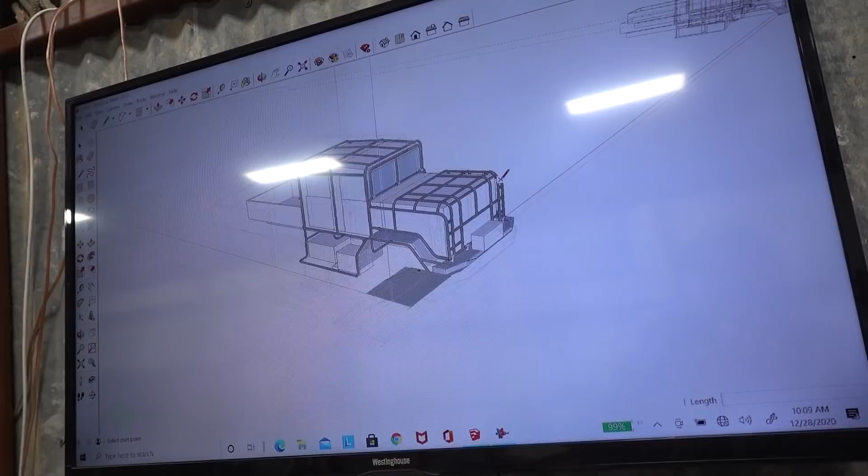This is crazy. This is what we started with. This is like what I kind of told him I was looking for. I sent him a bunch of pictures. There's like Humvees and some off-road buggies that have a cage around them all. And I was like, I want an exoskeleton like this. So he measured the truck and put it in here, and then he went in here and built a cage around it with what I was kind of looking for.

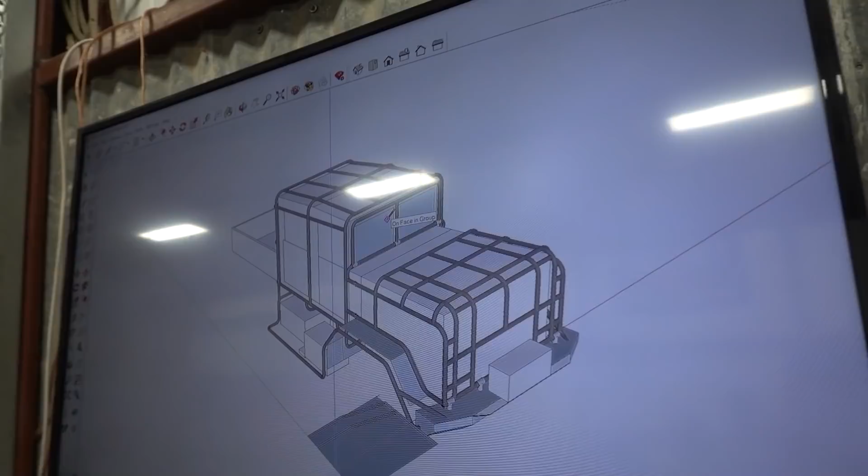I want to be able to plow through things. I also want a little bit of an exoskeleton around the cab here, and then you can see we have a window shield that will fold down out of the way. My plan is to put expanded metal all across the front of it.

The problem is, this didn't work out, right? No, we learned that pretty quickly. So Brandon welded up some pipes, and turns out this thing, you look at the truck and it looks very square. It's not as square as what we thought. He measured here and he measured here, and we all assumed everything was square, but actually the truck slopes down right here a lot more than you think. It also slopes inward, right?

Yeah. And so the pipes in the front were way off the truck. You can see the pipes are really far off the front of the truck, and it still looked cool, but just not as good as I was thinking. So we decided to go back and chop them. We did a little revision on it, and made it follow the body lines a lot better, and compensated for the unsquareness of the truck.

So, but it was definitely worth it. Let me show you what we got now.

As you can see now, we had those pipes. The plan was just coming straight off here and then straight down, because we thought the truck was square, but it really looked weird because it was sticking up so far.

So now we have two bends, one there and one there, to kind of follow the contour of the truck. We also brought this one down a little bit. Oh, it's raining a lot out here. Now they hug the front of that truck.

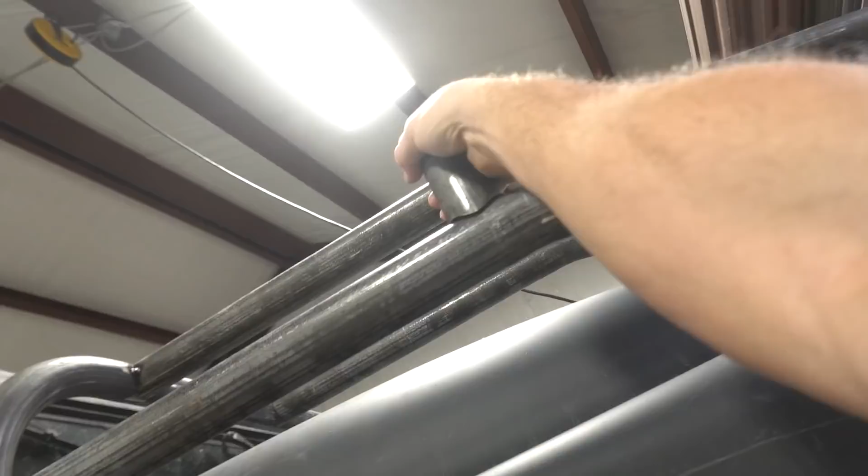Looks so mean. So the plan is today to continue cutting pieces and welding them up. This stuff is just kind of sitting up here, not all hooked in yet, so we're going to continue tacking everything. Luckily, we'd only tacked everything before, so it was easy and quick to take off, and we're still able to reuse the parts we took off and use them in other places, like that piece right there.

Brandon got it looking good, and I was like, we got to take it out and make it better. We're doing this once, we might as well do it right. So exactly, we tore it up, we're gonna make it a little better, but now we're gonna go along and get all the little pieces in, start filling it in, so we make it really strong.

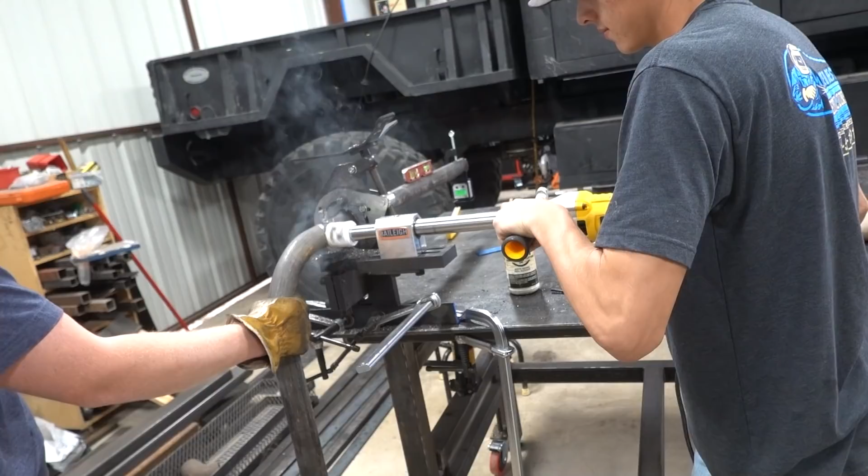We have a lot left to do on this. So he's cutting that notch there, but you can see he had a level here and a rotation gauge there, making sure everything is perfectly straight, because it needs to fit in there right.

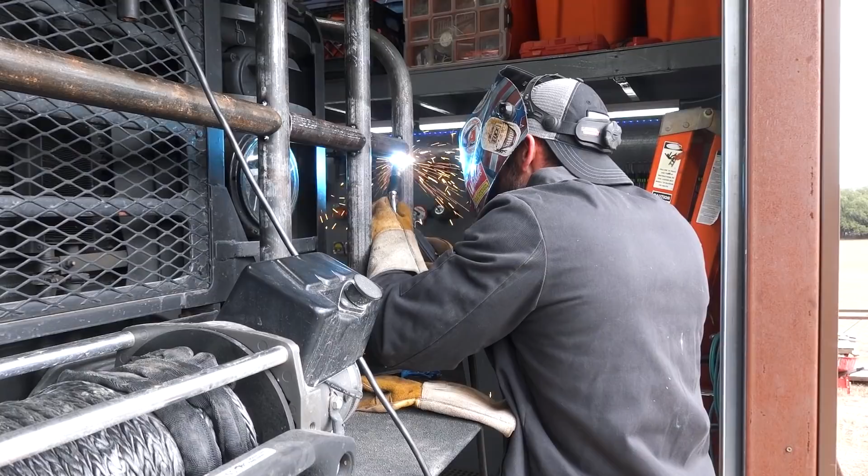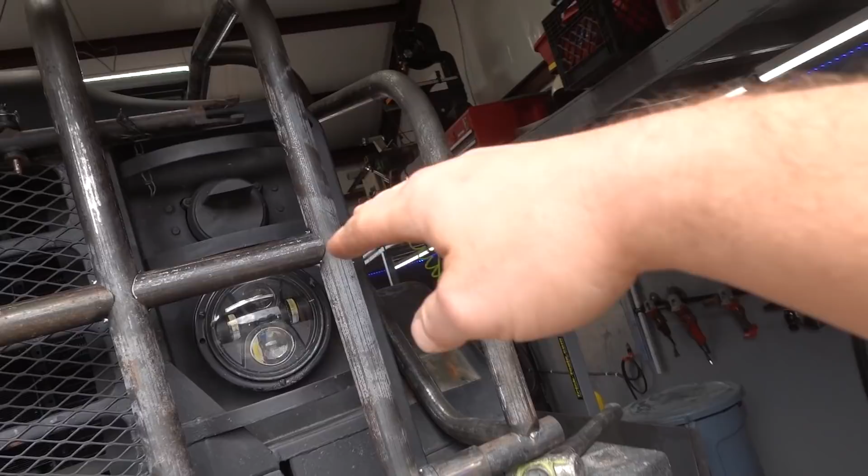So we just got these pieces stuck in here, trying to figure it out. The lights, I don't think are gonna be an issue. They're not gonna be blocked because, I mean, it'll block the top a little bit, but that light is almost 6 feet tall, so we don't really need it to be shining more up. We're gonna put bigger lights on the rest of the truck eventually for times when we're not on the road and want everything to be really bright. So this is not gonna be an issue.

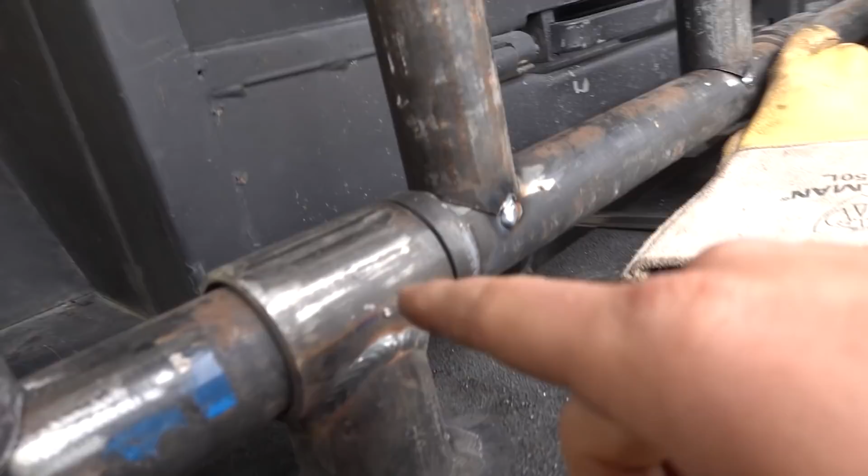Gonna be nice and beefy, just tying all these together, just tacking right now. We left a big opening here because this whole thing is gonna have to fold down so that the hood can come up — it has to fold down and not hit this. So we have these hinges here, basically just pipes sleeving this pipe, and this whole section is going to fold down around that.

And it's gonna be super heavy, which we aren't really sure how we're gonna actually physically move it down. But we'll figure that out later. Build it first, and then we'll figure that out, and work the kinks out — like, how do we actually lift that up? Because think about this, that's all that weight's gonna be over there. You have to first lift it all the way up.

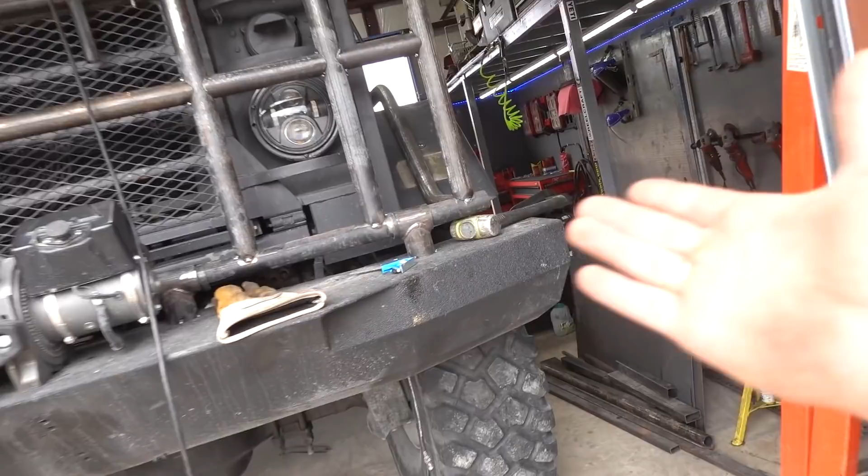And then once you get to that tipping point, all the weight's gonna want to smash down here. So yeah, we're gonna have to figure that out when we get there. But let's build it first, right? Exactly. Yeah, I think we're making good headway.

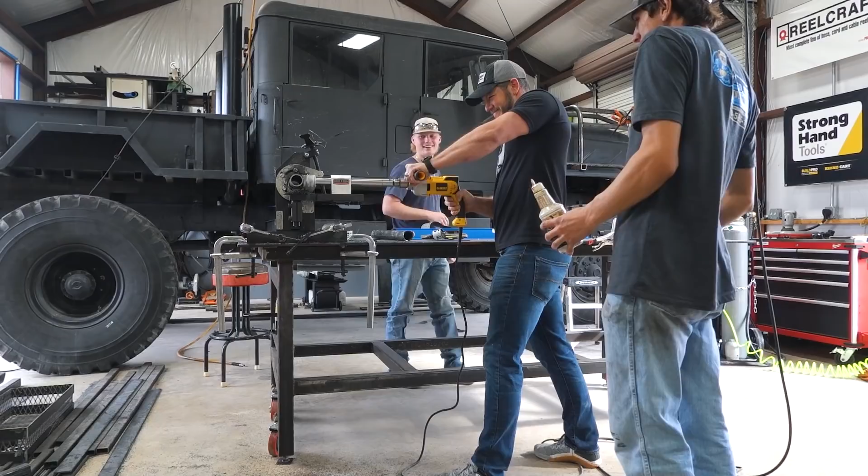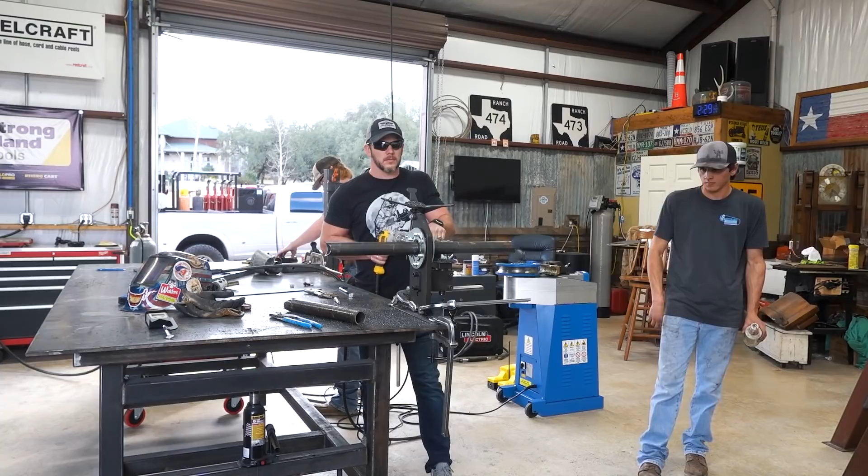Kind of making this stuff up as we go along here. So we have these things cut to go probably about right there, same with this one — it'll go right about there. So we're gonna have a line going across right here.

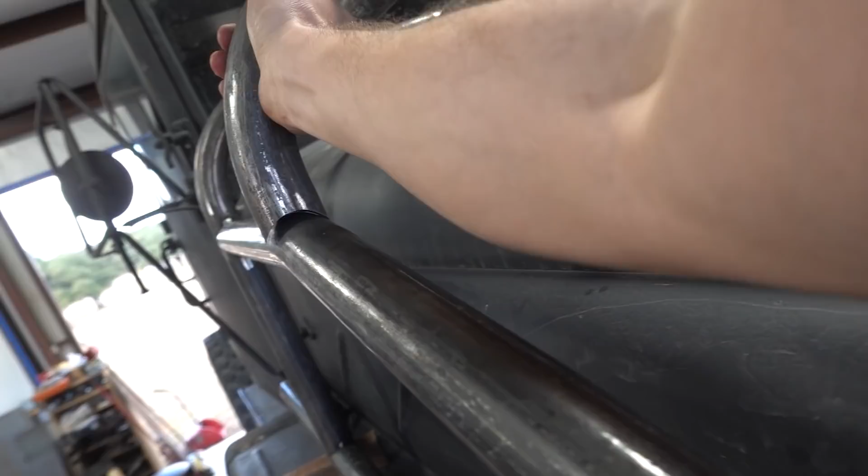And then we have these macaroni noodles right here — and I can't do it with one hand. We're probably gonna have it right about there is where it's gonna make the turn. It's actually gonna be back a little bit, and then it will carry on across there and macaroni noodle down to the other side as well. Just trying to figure out all this.

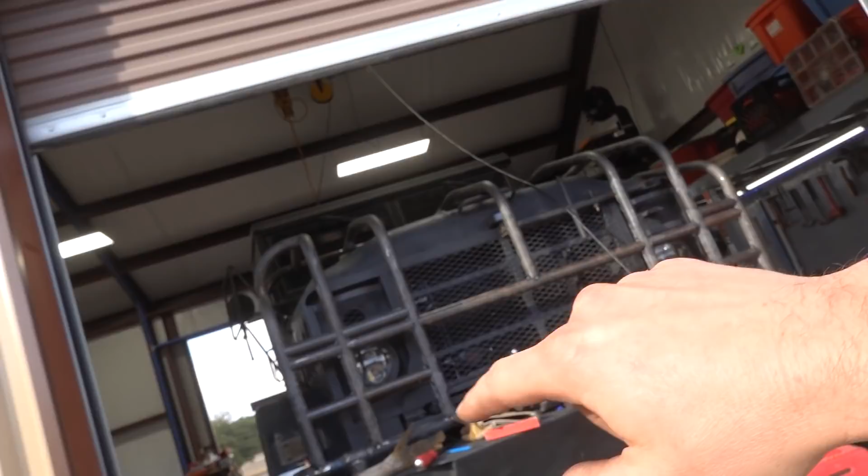We want this thing to be super beefy, so we're trying to figure out how to make this the beefiest. On the top of the hood, it won't have as many supports because we're not gonna be hitting stuff as hard with the top of the hood, but the front, I want to be able to drive through that building or Whistling Diesel's monster truck or whatever and come out unscathed.

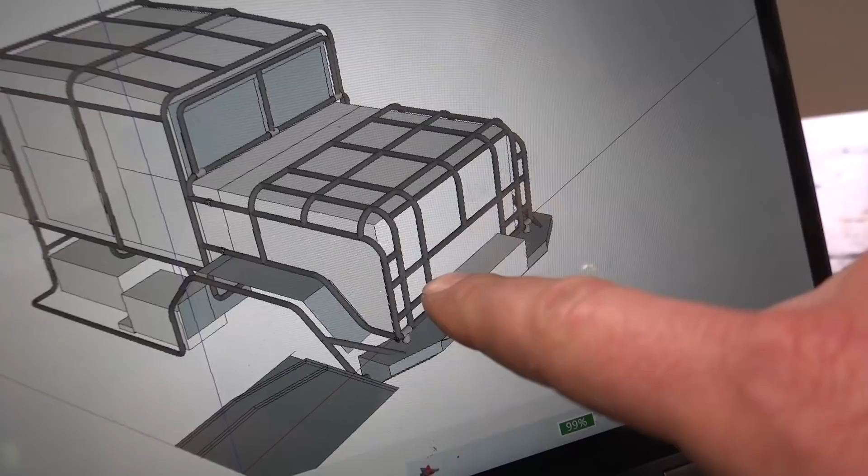So that's what we're trying to figure out here, just trying to get all the weaknesses fixed so this thing can plow. You can see that's kind of different from our plan. We don't have that bar, but we had one on the tip and another one right there. We're not gonna do all that. We're gonna have it come up a little bit over here, and these are all double angled now, so they're not as boxy as it looks in this picture.

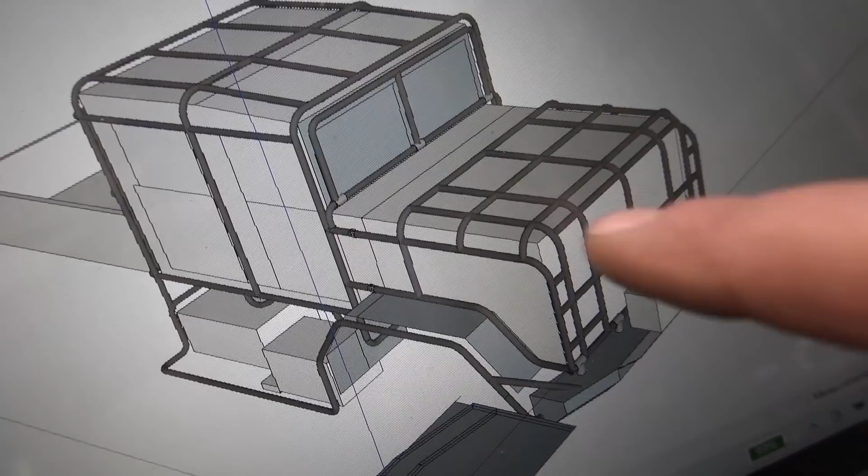What you haven't seen yet is the windshield guard, which will fold down right there. Also, this fender is thin metal and sticks out over here, so a tree could rip it off. So we're gonna have some bars that come out and follow that fender all around, tied into the frame underneath to give it strength.

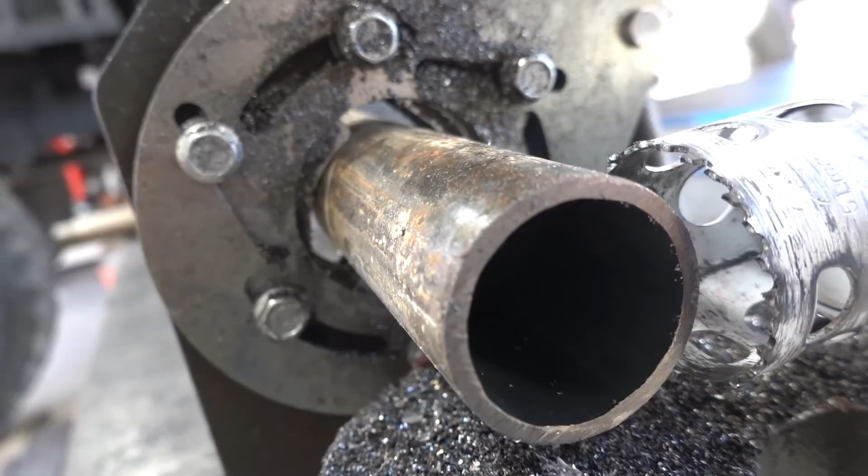This is all Schedule 40, 1.5 inch seamless pipe, so very thick, very heavy duty for this 5-ton to start ramming some stuff. Brandon was just telling me this is actually 2-inch outside diameter pipe, and this is a cool little mechanism to make these cuts.

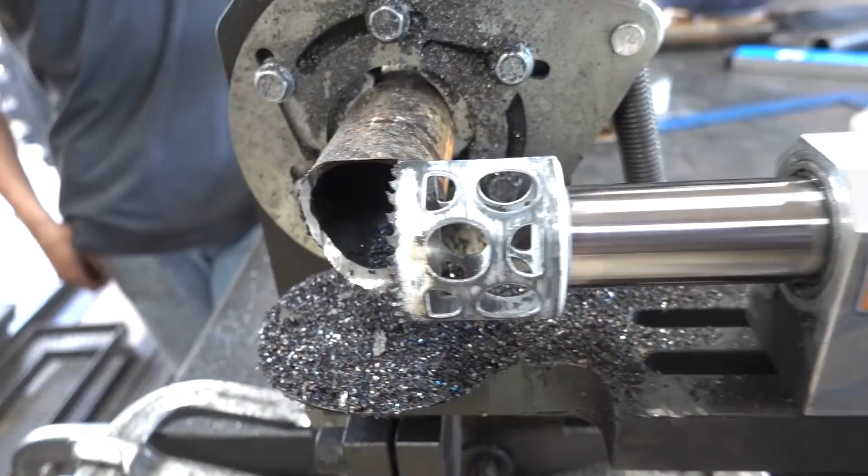What do you call this, saddles? Yeah, or pipe notching, this is how we notch them. This drill just keeps everything in line right here and makes a perfect cut right through that pipe so it fits perfectly on the other pipes, making a really nice, easy way to weld it.

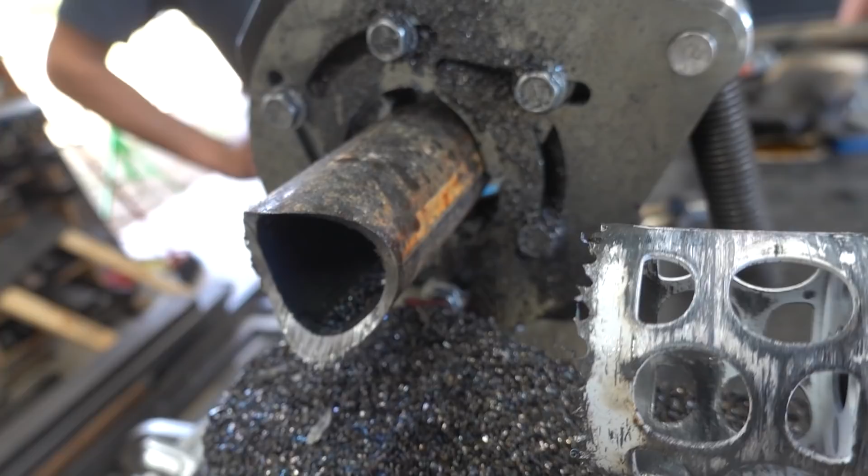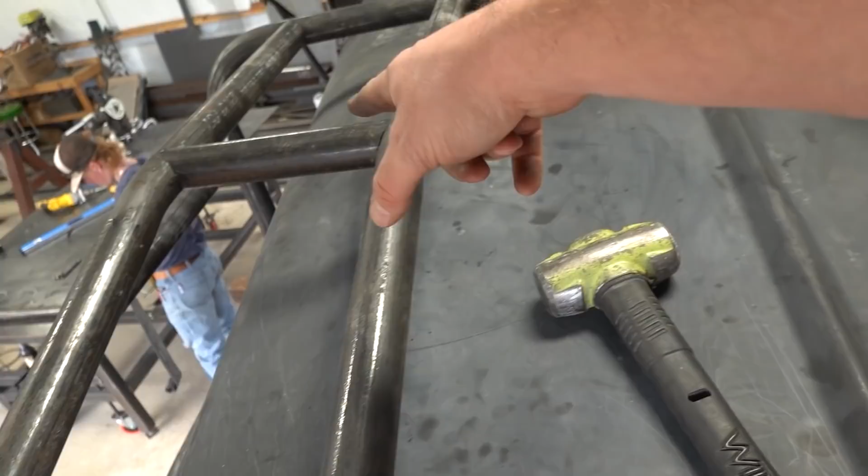So that'll go up around there. This one is gonna go right here in line with our macaroni noodle. We'll have one up here, and these will continue across there and there. This one will go like right here. We'll make another macaroni noodle that'll go right down there.

So the hood will not have nearly as much. These are gonna be spaced about that much, like that. So very beefy in the front, less beefy on the hood up here. Oh, there's our noodle right there. Perfect, but like in line with this one.

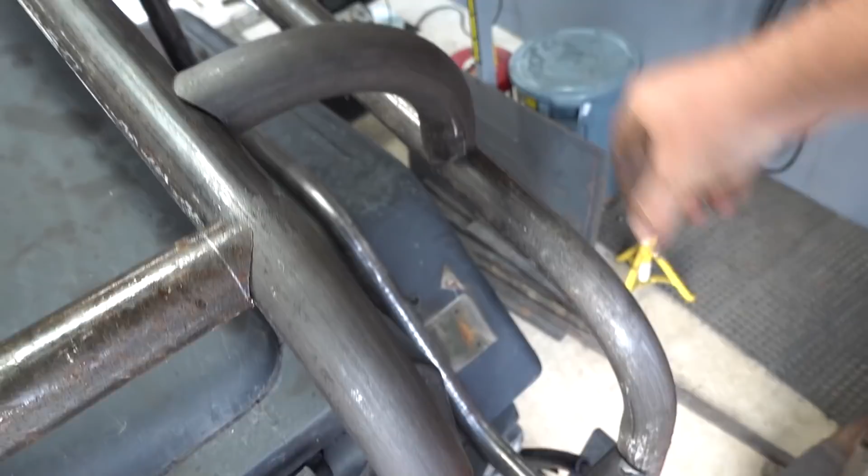Okay, so now we have everything cut, not tacked yet. Down there, these are all tacked. We just kind of wanted to eye it up, see what it looks like, kind of what it looks like when you're standing up on a big ladder. Yeah, it looks awesome. And those things that have fallen down will all be up higher at that level right there.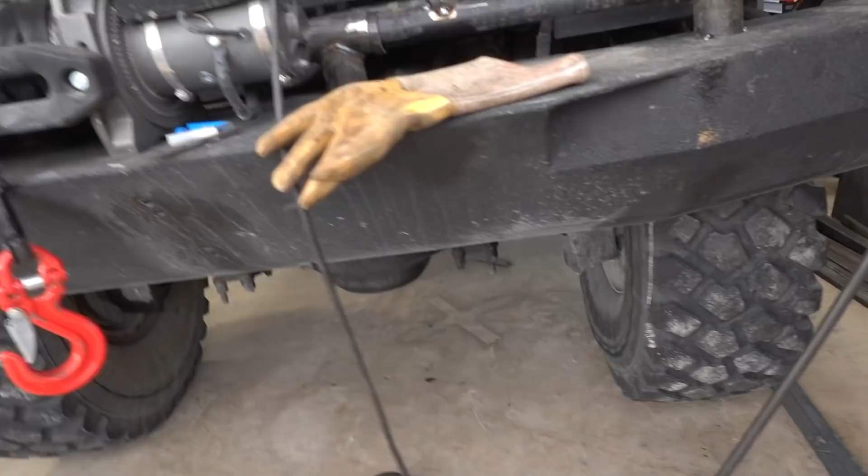And so when we do hit something, if we hit something, I don't know if we're gonna hit it, the bumper and whatever's sticking out in front will take the brunt of it. So the bumper will hit first. We're gonna put a big bullnose back on here, check the winch. So the bumper and bullnose will hit first, and then this will be hit by smaller things. Not that I'm worried about this thing really breaking, but God, it's beefy.

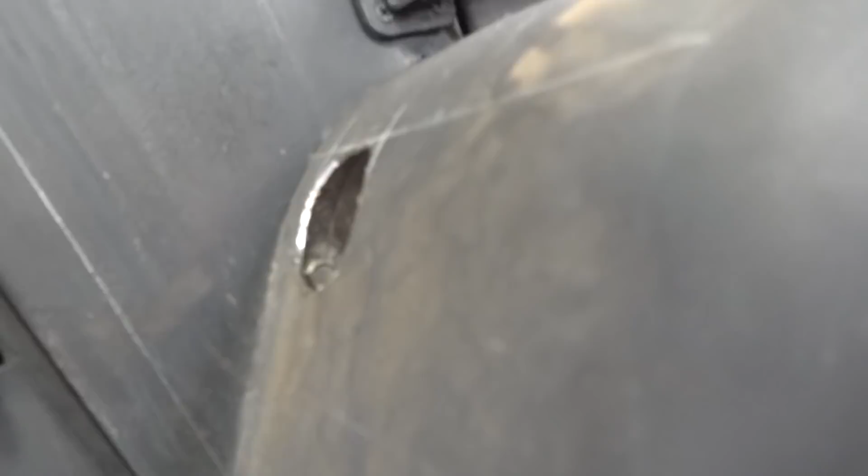Wanted to show you how they're making these bends too. We're gonna have a lot more bending to do. We're gonna have a hoop coming from the frame up through this hole here, going up around, and it'll go under the windshield. But this is his big tube bender.

It's really neat. A lot of these bends, like if it's just a flat bend, one bend in a pipe, it's not a big deal, but that pipe goes up and around, and there's another bend on the other side. Same for this one, there's a bend here and a bend here. Those bends all have to be in the same plane or it gets all screwed up. So there's a lot of thinking behind this to make sure you're doing it right, a lot of measuring, making sure everything's level. You're not bending in different planes, because then your pipe is worthless.

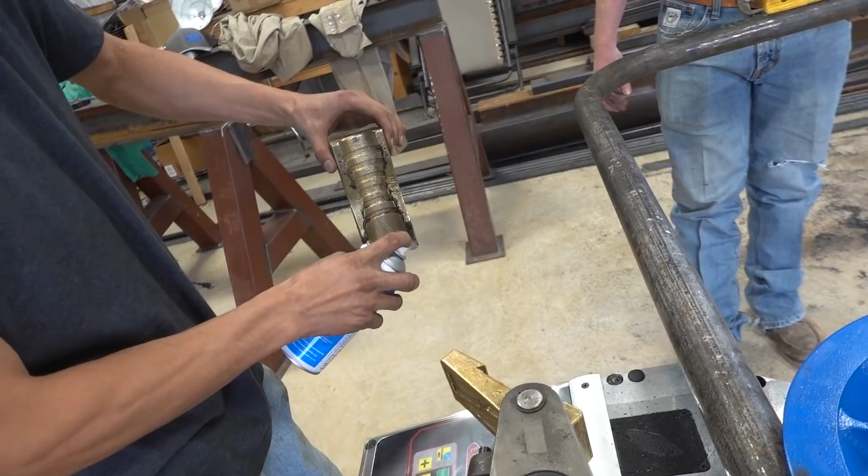So when you said that is a, what do you call it? What's the word? It's like a piece. This is our consumable. Consumable, yeah, it's a consumable. It's a brass piece, and it slides along here and just degrades over time, depending on how clean your pipe is.

If you have real rusty stuff, it's gonna eat away a lot faster. If you got real clean stuff, it's gonna last a lot longer. So eventually you'll have to buy another one of those.

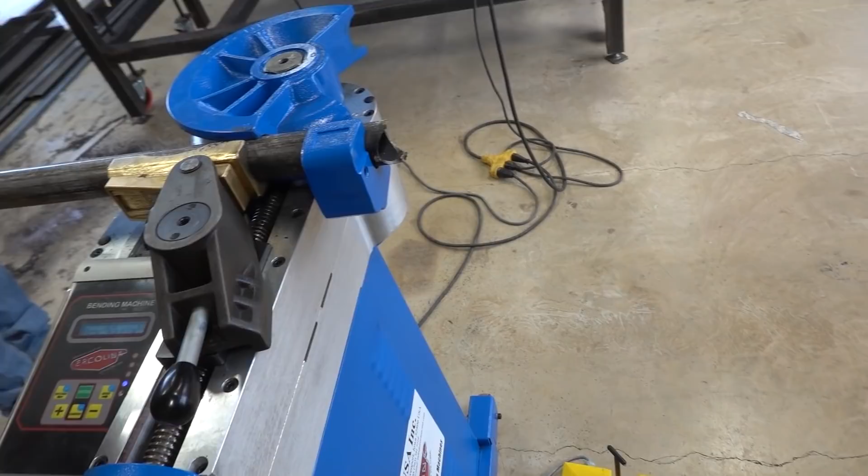Yes, gotcha. All right, so we ready? Yep, we're gonna lock it in. Our encoder's already set to 0, so you're just gonna put it in, curve a bend, here we go. So I'm just gonna press this foot pedal.

God, I feel like I'm in danger right now, like we're this close to this thing bending. Look how easy that is. And quiet too, I didn't know it was gonna be that quiet.

Yeah, and see, we still have some coating on it, so that's what all this flaking is. Yeah, it's not actual metal or anything.

Okay, so now it bends a little further than 90 degrees, right? So because it springs back, to 19. Okay, so now what you're gonna do is you're gonna hit return.

Oh, keep going. More? Yep, all the way back around. Okay, sweet, so now we have a beautiful 90, just like that.

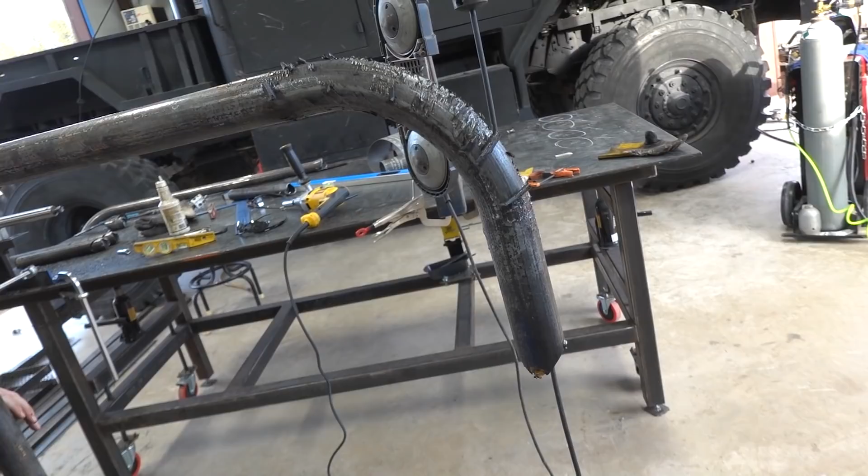That is so cool. So he was just talking about the spring back, so you can imagine metal will bend a little bit but then return. So to make a 90-degree turn, what he was telling me is they set in 90 but then an extra 19 degrees for spring back. So it bends at 109 degrees, and then when it lets off, the pipe comes back and sets at 90.

We're done for the day.

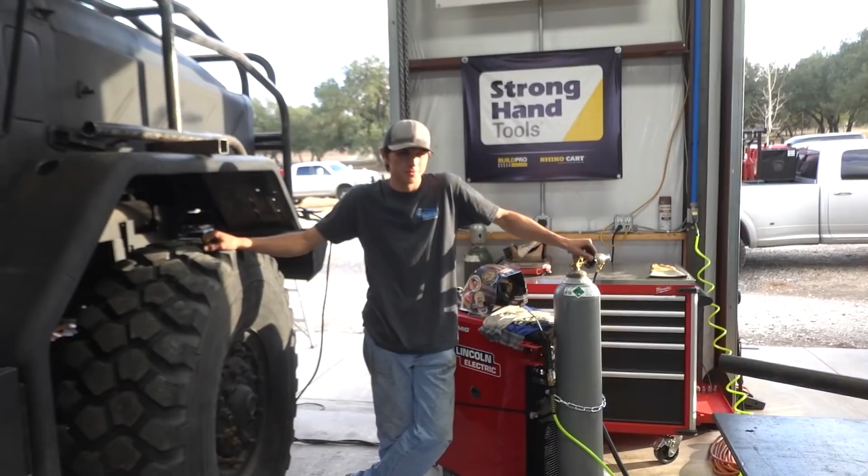So let me know if you think we forgot anything. If you're like, Matt, you didn't put a Barrett mount on the roof, let me know. I actually got this idea for tube frame exoskeletoning the front of the 5-ton, just like I used to have an Ultra 4 car, and it was all tube frame and sort of exoskeleton. And then like Street Speed 717 has a Blazer that he took all the body panels off, and it's all exoskeleton tube framed, it just looks super cool. And I was like, you know what'd be better than that is a giant 5-ton that can already drive through anything. But I was like, what if it could drive through anything and not get hurt? And so that's the plan right now.

So we were kind of developing this as we go. I've worked a ton on this idea, I've worked with Brandon a ton on the idea. I brought the idea to him, told him what I was thinking. He had some other ideas that we kind of incorporated into it, and we're still changing it up as we go and as we see what it looks like and what makes sense, versus just playing on paper or on a computer screen. So we're getting there. So let me know though, really, let me know if you think there's anything we're missing or forgetting. I would love to have your suggestions, because we've never done this before. Me or Brandon has never done this thing before.

So we're kind of figuring it all out. We got some big beefy pipe, we're putting a lot of it in there, and we're putting it in the parts we think we need it. But yeah, I've never done it. So if you're like, hey, I am an engineer, or I've built these kind of things before and Matt's not considering something, I would love to know that.